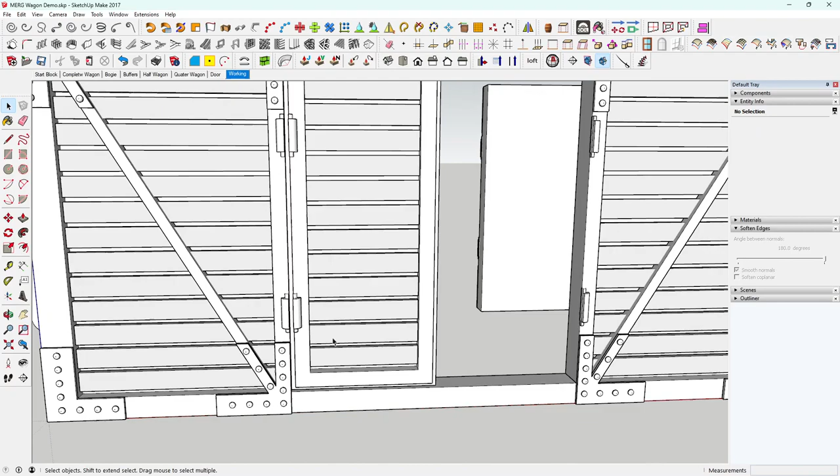So a little bit more work on the door. Not really happy with that gap there, so what we can do is open the door frame up, or the door group. We'll click on the edge and pull that across.

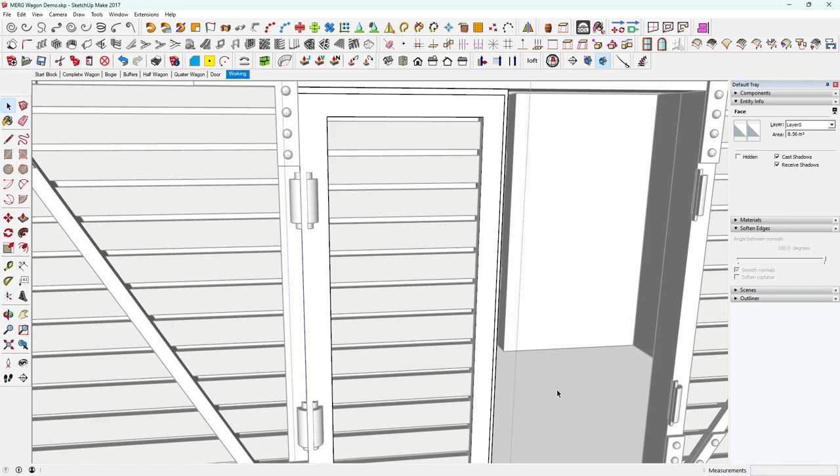I'll leave the gaps around the top, and then we'll just move the hinges over. It just didn't look right, so we'll click on the group. I think we've got the hinges, and we'll just move them across so they join up.

They just didn't look right, so along the red, join it to the other one, and job's a good one. So these hinges now, we can cut them.

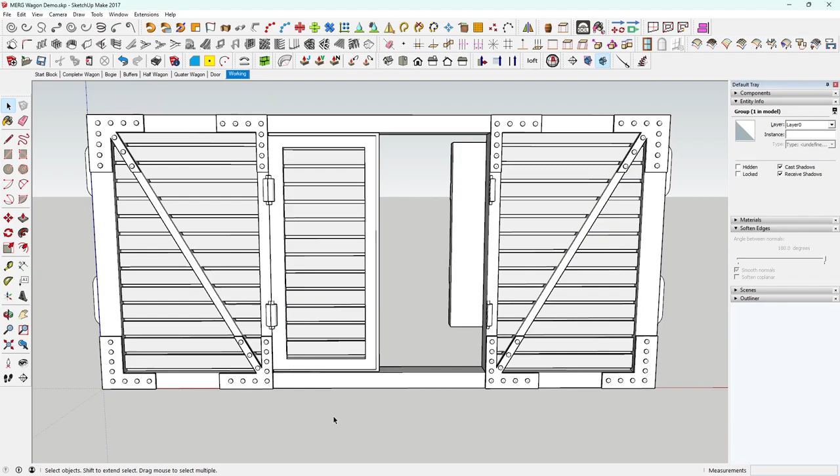We'll open our door group and we'll do an edit, paste in place. What we need now is, we don't need them, but we can put a couple of handles on.

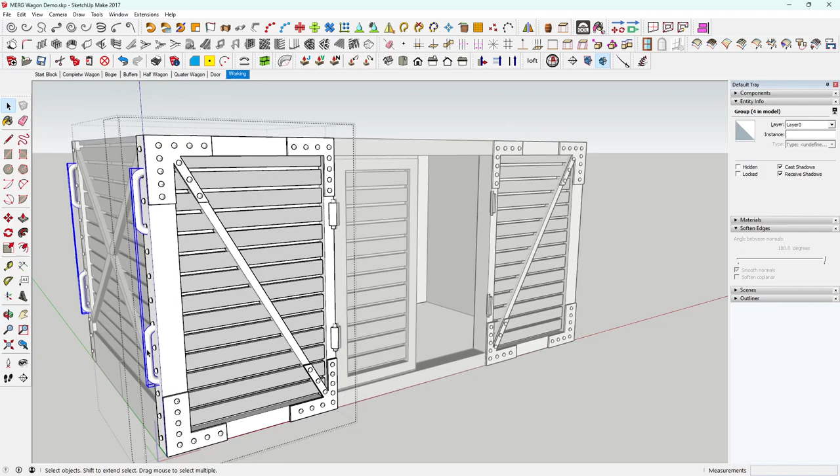So if you open this group up, the corner group, click on till we get to the door handles, and then we can copy. I'm not sure if it's going to copy all of them. We'll find out. If I copy,

and we'll do an edit. Oh no, we actually just paste it. Yep, it only copies 2. I thought it was going to copy it. Seeing it highlighted them all, it will copy them all. But it's not going to do that.

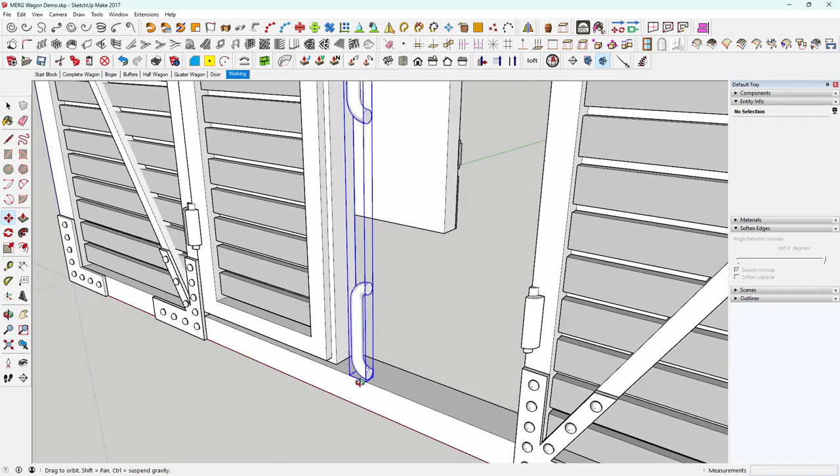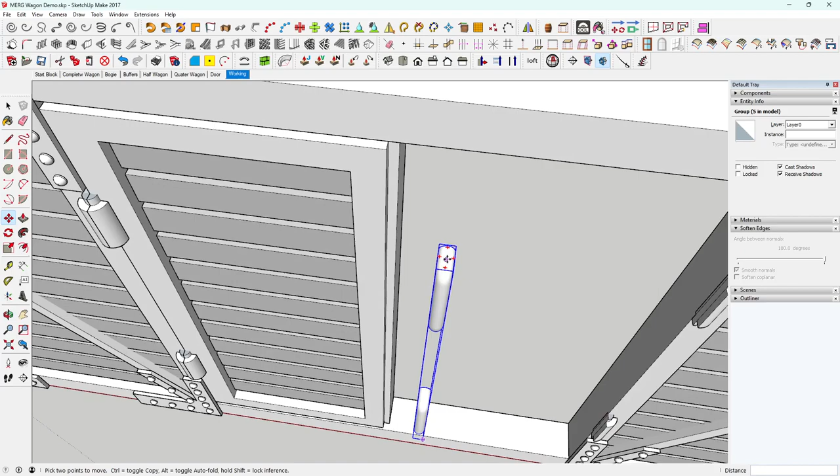So we'll bring it onto a surface there, and we want to rotate it. A couple of options for rotating. We can come up to the top and it will put a protractor on, and then we can bring it round, follow the protractor around. So while we're moving it, we can use a protractor. Any of these red pluses will move it round on the protractor.

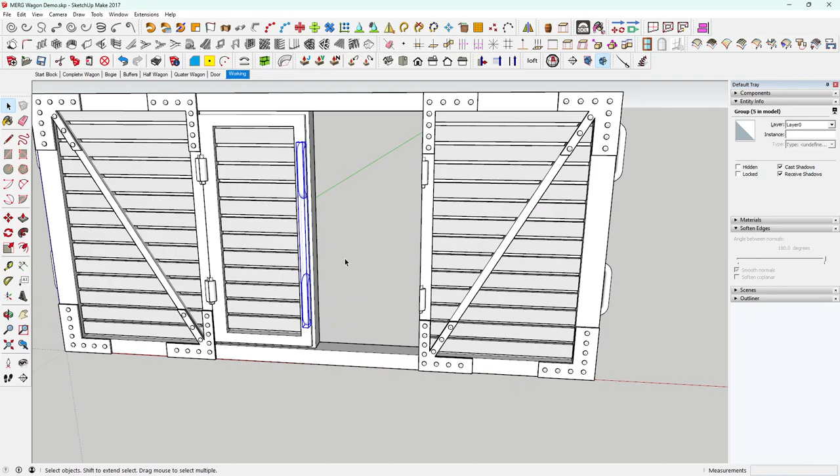We'll click on and we'll find our door, find an edge, and move it down. I mean, you want one handle, you want 2 handles, not a clue. So we're good there. Let's just line them up in the middle a bit more, move them over. There we go.

So we'll click on the handles and we'll cut them. We'll open our door group and we'll do an edit, paste in place.

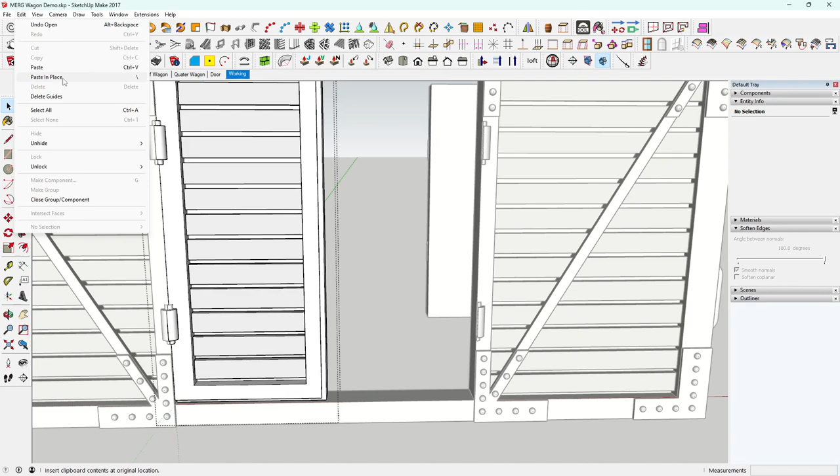I suppose we can do a hasp on there, so we'll put a guide in, find the middle, on any edge, come down, and it'll click to the middle there.

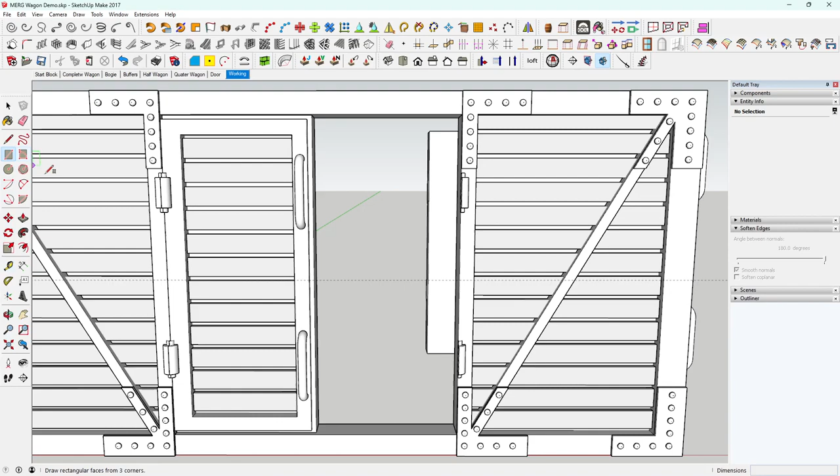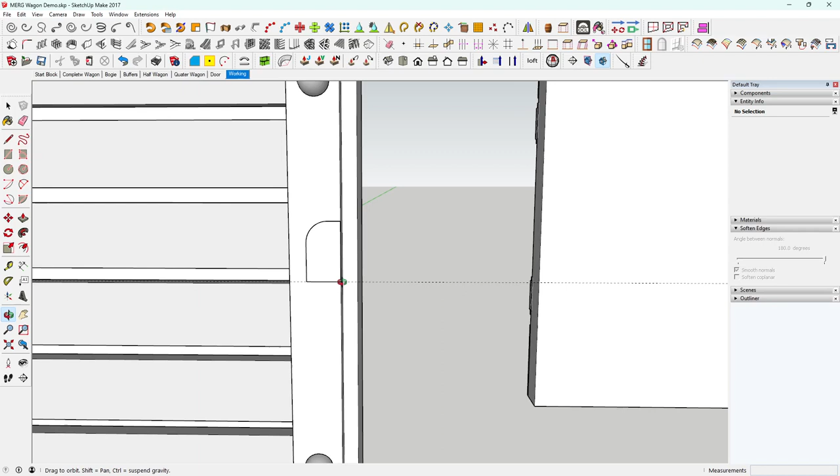We'll draw a pretend hasp, I don't know, just a little bit of detail. Draw a little square. And we'll come in, we'll use the arc tool just on the edge till it changes magenta, double click, and it'll just round that corner over.

We'll click on, we'll pull it out, 0.4, that normally stands out quite well. Actually it's too far, we'll push it back, 0.2, right, Control Z. We'll pull it out 0.2

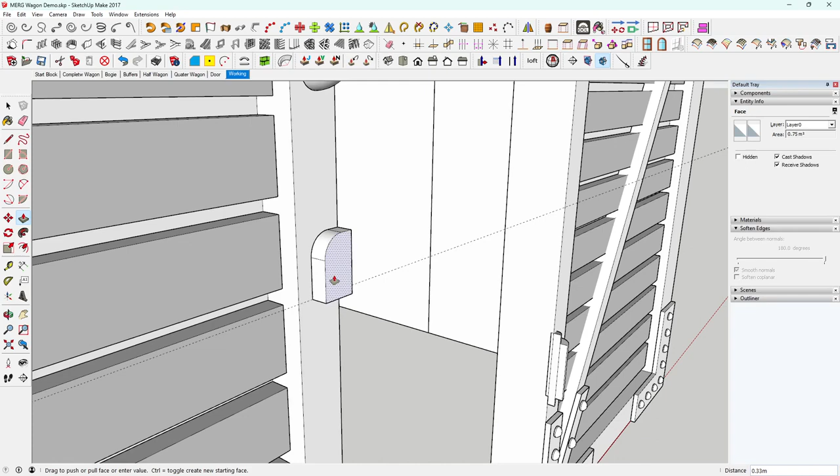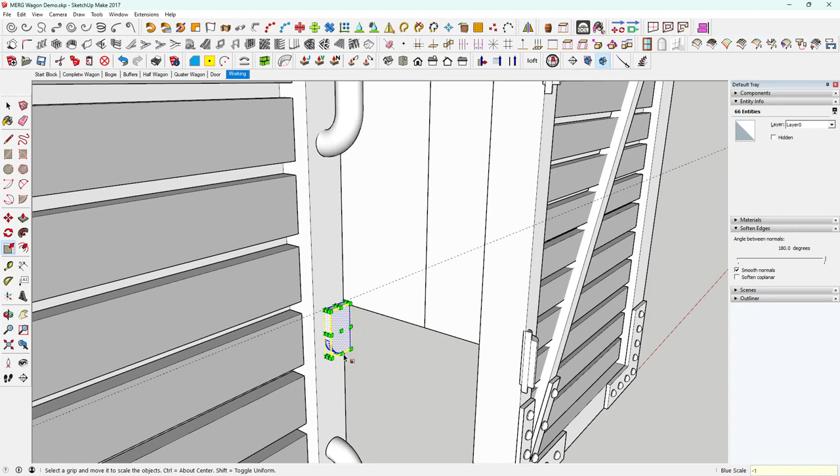and click away. We'll triple click, we'll scale it, actually we'll copy it and then we'll scale it, click on middle and we'll do a -1, enter, and then we'll do an edit, paste in place, and then we've got a duplicate in it. There's a bit more detail, and we'll triple click, right click, make a group, cut it, open our door,

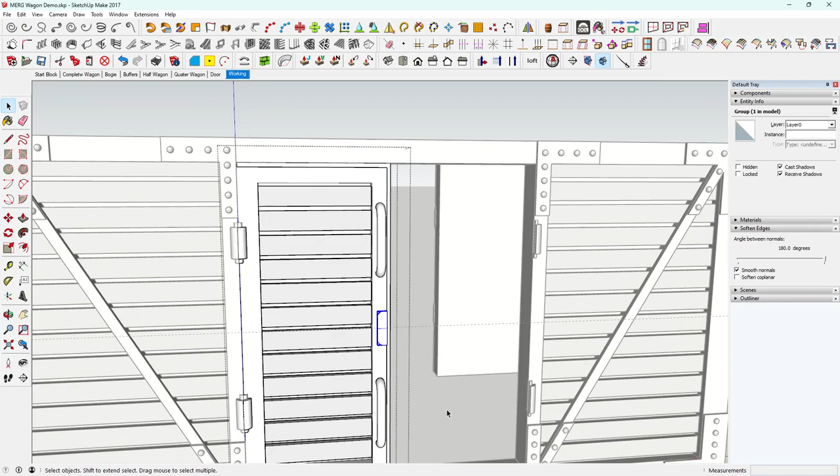and we'll do an edit, paste in place, and there we go. It's just little bits of detail.

Right, we need some hinges on the door as well. Well, we can do that. So we'll do it similar to we did the other one. We'll draw a square in the corner, any corner, and then we'll come down,

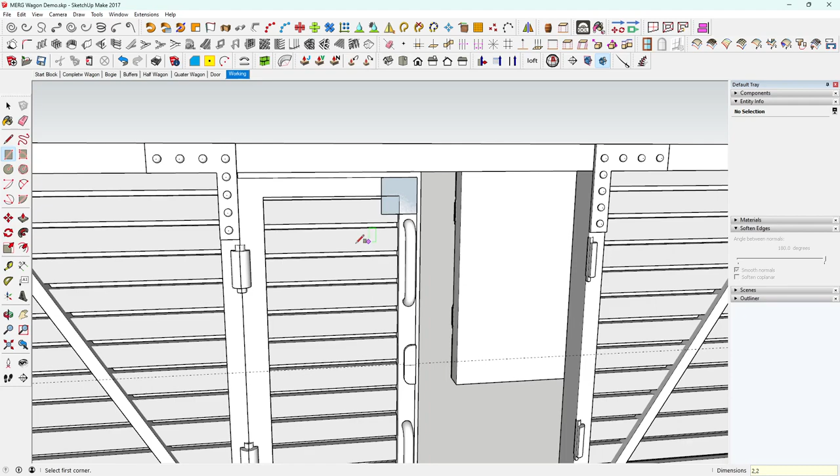say 2,2, enter. Now give us a bit of detail. Right click, reverse face,

and then we'll just draw around that piece in the corner. Click on the edge, delete, and click on this edge, delete. So we've got this little corner bracket here.

Right, we can use components. We've got our rivets somewhere.

That's a thing. I've got a few components on here now. Hinge, no - I thought I saved that as a rivet. Hook, there we go, rivet 01. I should really change that to a list because it's going to be unwieldy.

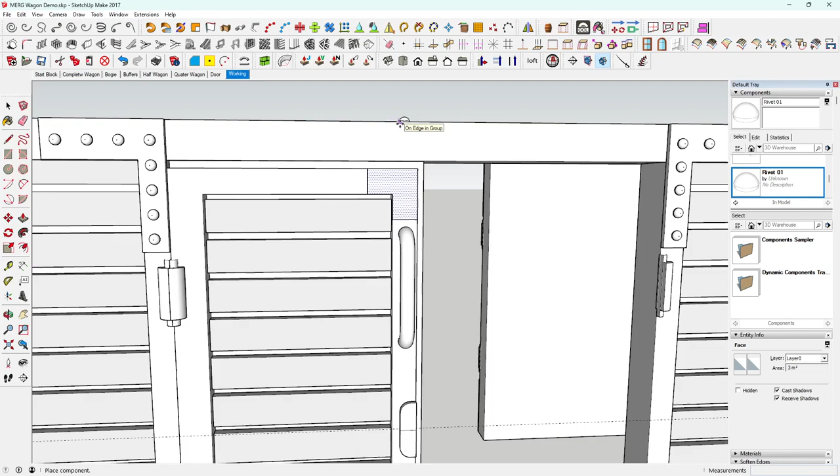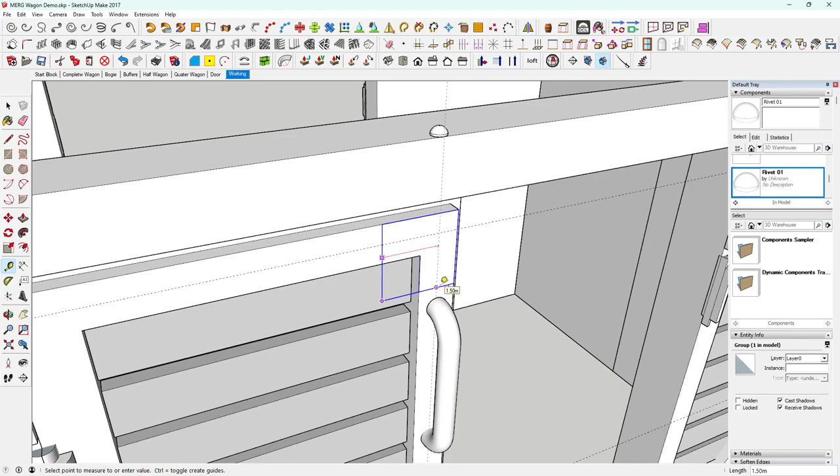So if we click on it, it will come in, obviously not the way you want it. So we double click, right click, and make that a group so it's not going to move around. Let's put a guide in to the middle, and a guide across to the middle of there, and then we'll move this rivet.

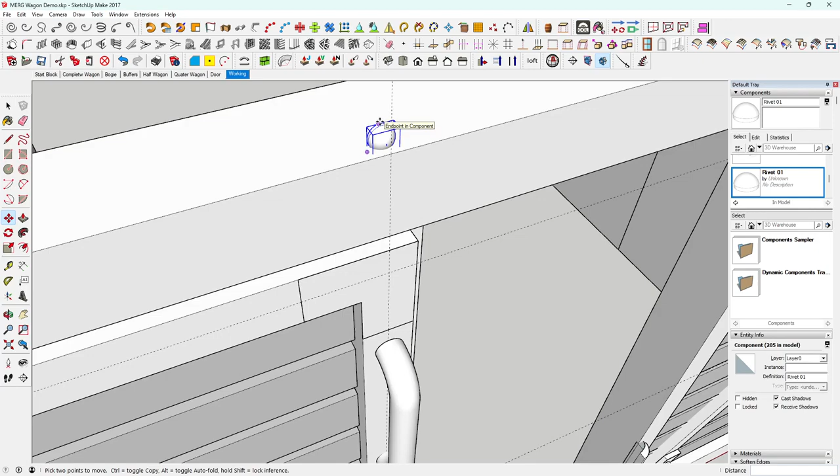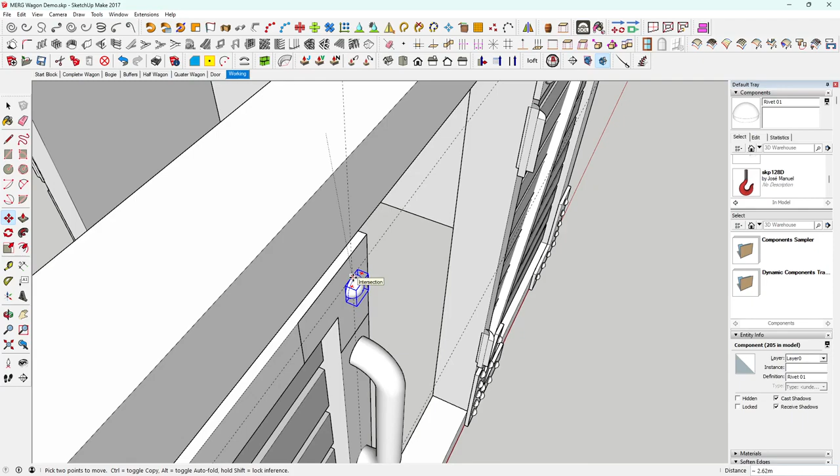First thing we'll do is, if we move it, we can use our rotate and move it round. We'll move it on the edge, and then if we press the up arrow, find the crosshairs, press the up arrow, press the up arrow, Control Z, Control Y, and we'll click on the edge, we'll do it up, click on the X, up, and then click on it. That was a fatal mistake, didn't click on it.

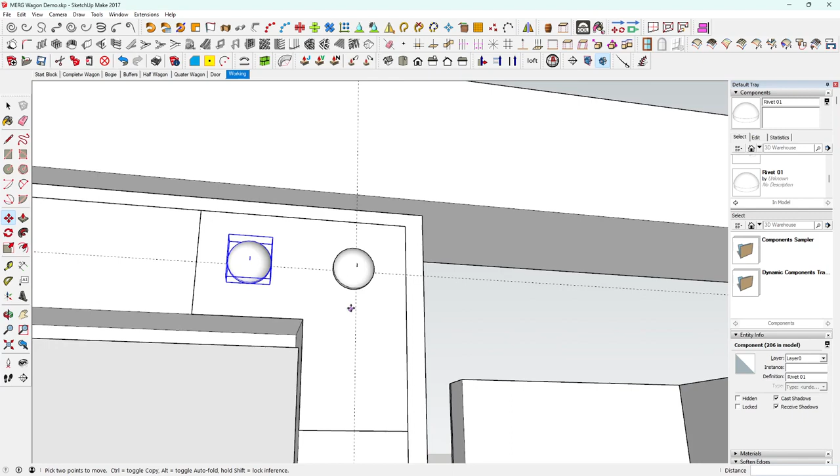We'll just move that rivet up on the Z, so it's in the middle, and we'll do a control along the red, and then we'll do the same again coming down. This is just extra little bit of detail, makes the model look a little bit better, lets it pop. Yep, we're good for that.

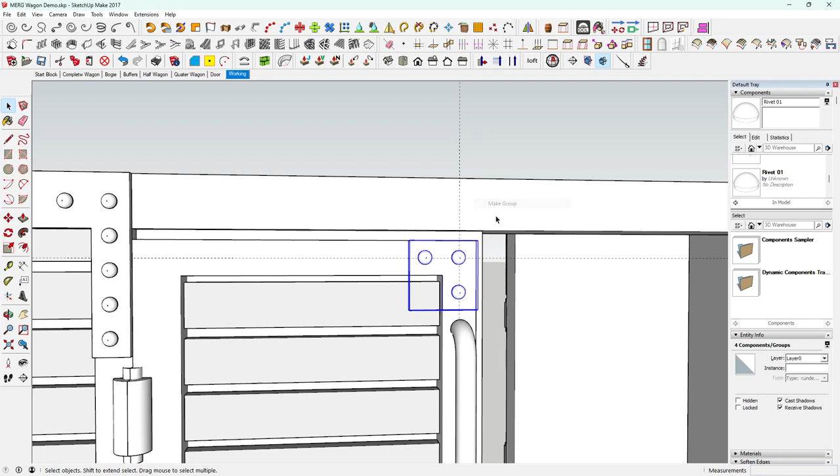So if we click on 1, 2, 3 rivets and the background, right click, we'll make that a group. Then we'll move it across to the left. We do escape, we'll do a control...

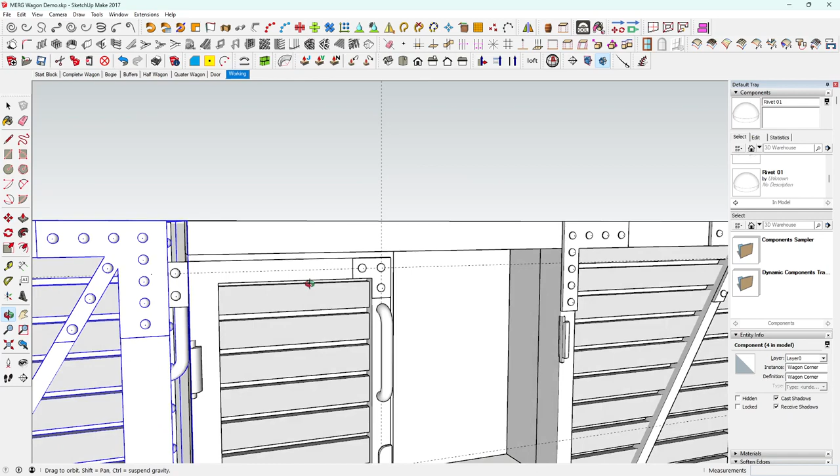...along the red to that corner, and if we flip that, right click, flip along red - obviously we need to click the object we just moved, and then right click, flip along red, and then move it back along the red to the corner.

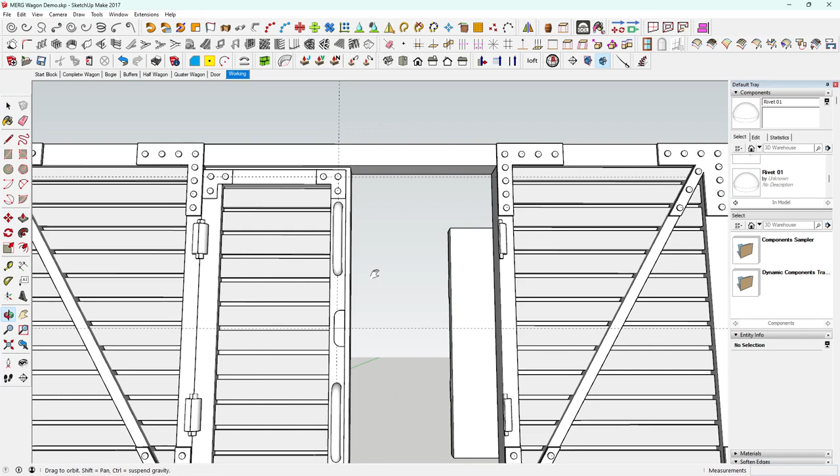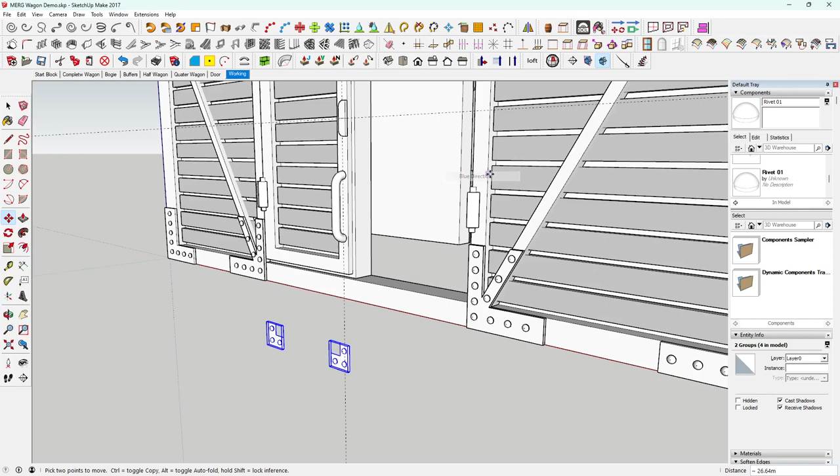That's not too bad, is it? And then what we can do is we click on control, and then we can copy them. So we click on the object, we do a control on the Z axis, and we'll copy them both down, and then we'll right click, flip along the blue to turn them back up, and then we can get a corner, and we go back up on the blue, and a little bit of rivet detail on the door.

Now this is entirely up to you how much detail you put on, where you put it on, and whatever. So I'm just showing you a few techniques. It's not prototypical, I know, but it might help you make a decent model.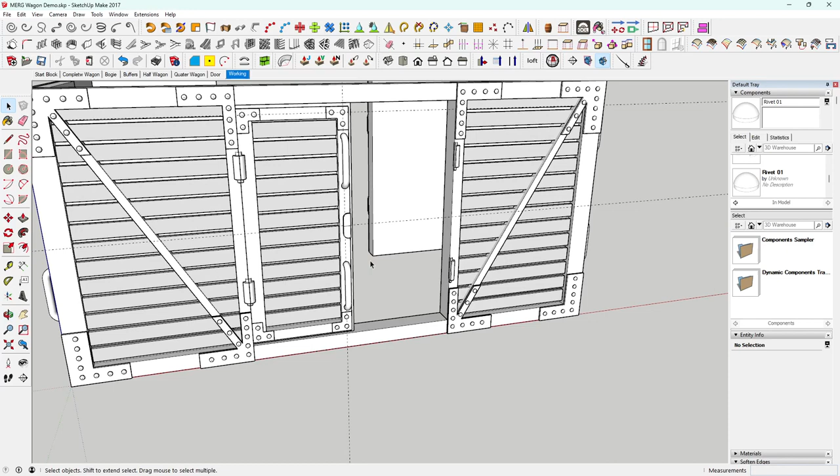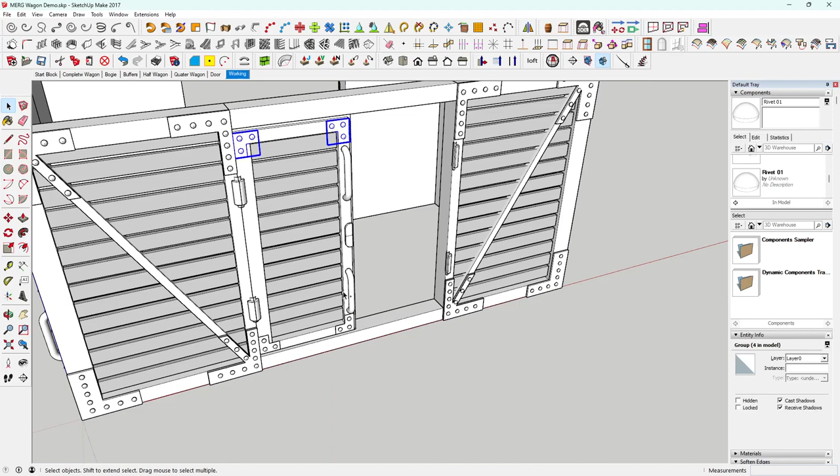So we click on the brackets, all 4. Actually, we deselect that line. Clicked on, we do edit, delete guides because they got in the way. So we click on the corner, 1, 2, 3, 4, holding shift, make that a group, and we'll cut that group. We'll open the door up, we'll do an edit, paste in place, and then hopefully everything is attached.

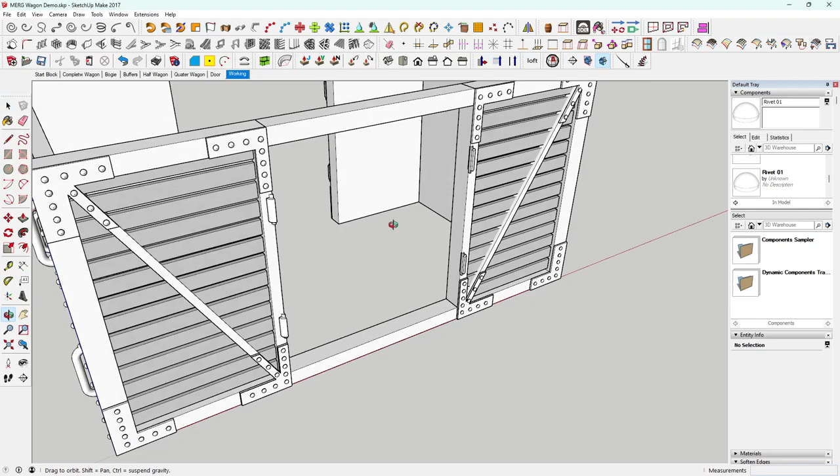So if we right click, we'll make this a group, we'll hide it. There you go, and if everything hides, you know it's all in that group. So with a Control Z, we'll bring it back, and then we'll right click, and we'll make that a component then.

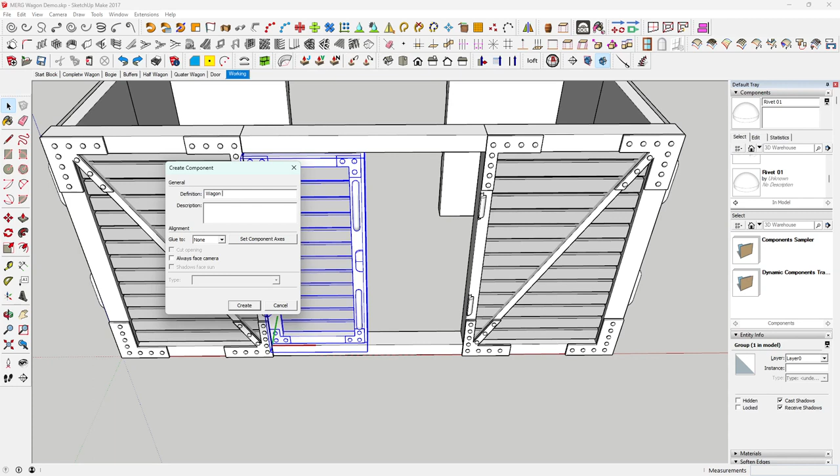So we'll call that... door. Just wagon door, I suppose. Wagon door. Yep. And then we'll create.

So now what I need to do now is probably the best way is to copy that. Then we'll scale it. If we can find the centre, red scale along the red axis. We'll do a -1.

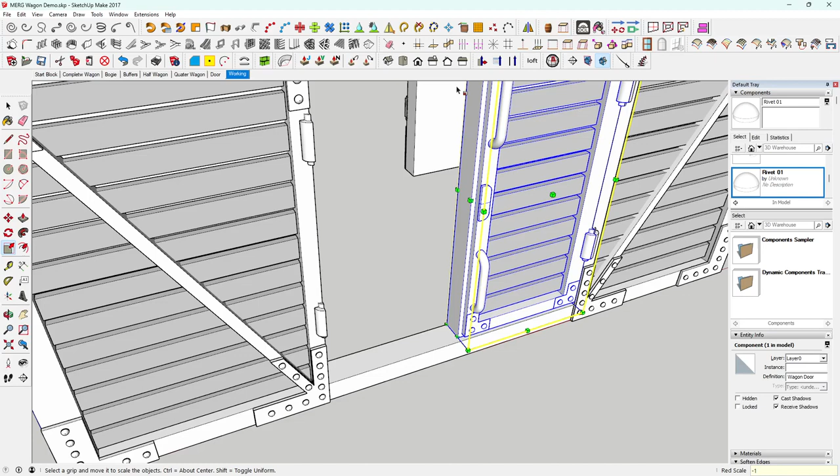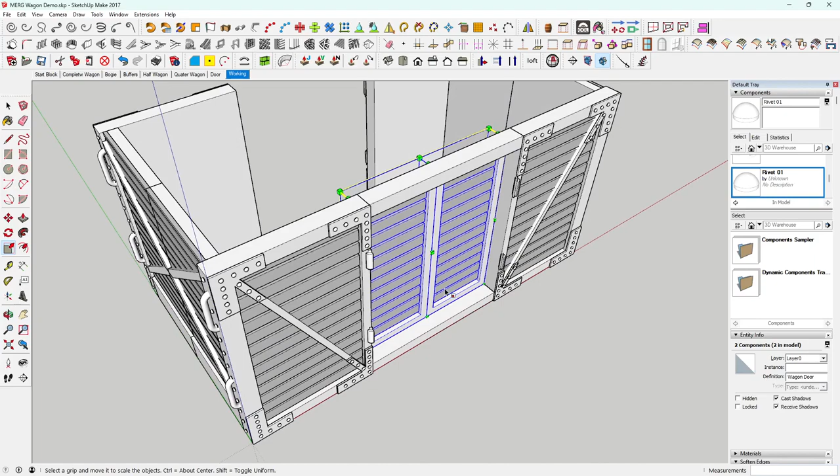We'll do an edit, paste in place. And if we do a control and click on that one, and we'll do a copy. We'll do a scale again along the middle, -1, enter. And then we can move this on the corner along the green axis.

Let's find the other edge. There we go, there. And then we do an edit, paste in place. So now we've got 4 doors.

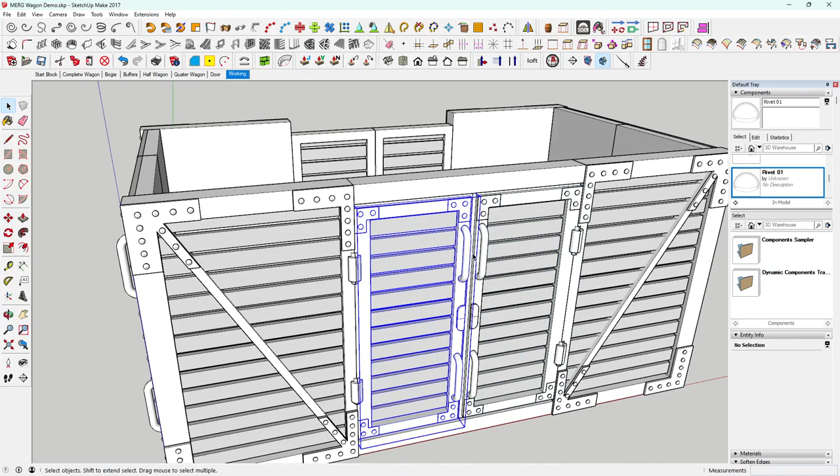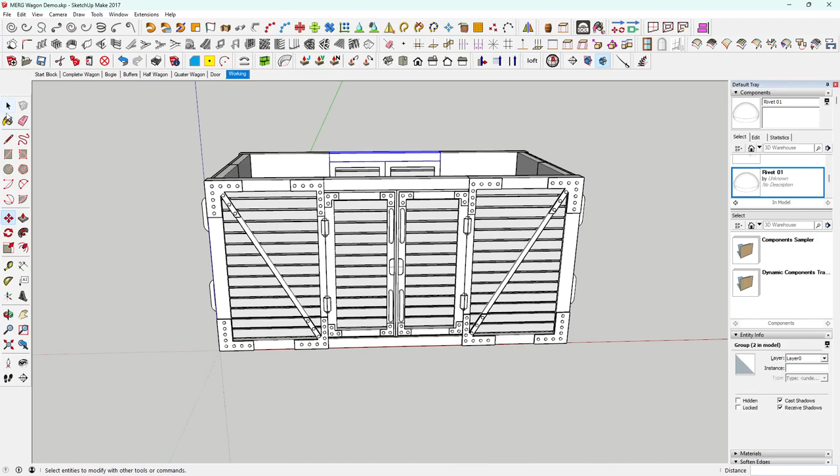We can make them a group. We haven't copied over this bit though, so if I copy that over, just click on, and we do - actually we'll click on this edge, control, green axis, copy over. So far looks a bit like a wagon side, and then we'll move on to our roof.